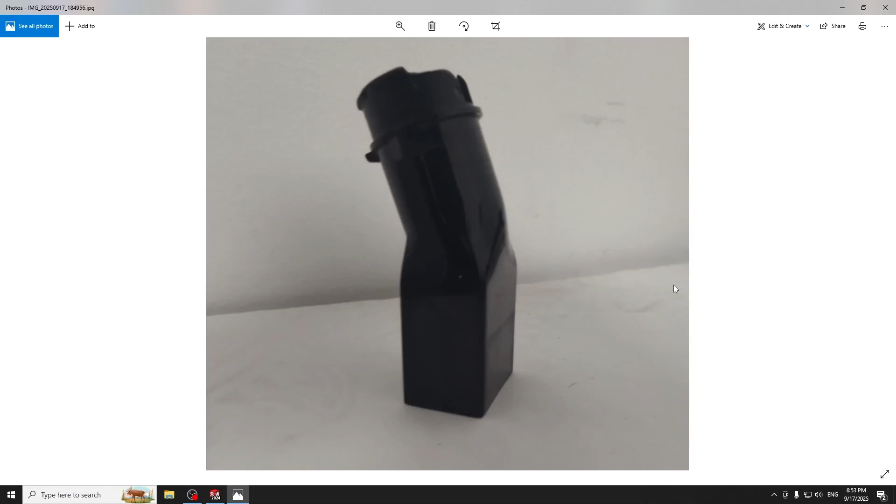Today we have this plastic broken part which belongs to a vacuum cleaner. As you can see, this edge is broken, which locks into another plastic part. Also we have this shape, a tube and a cylinder, with a 15-degree angle.

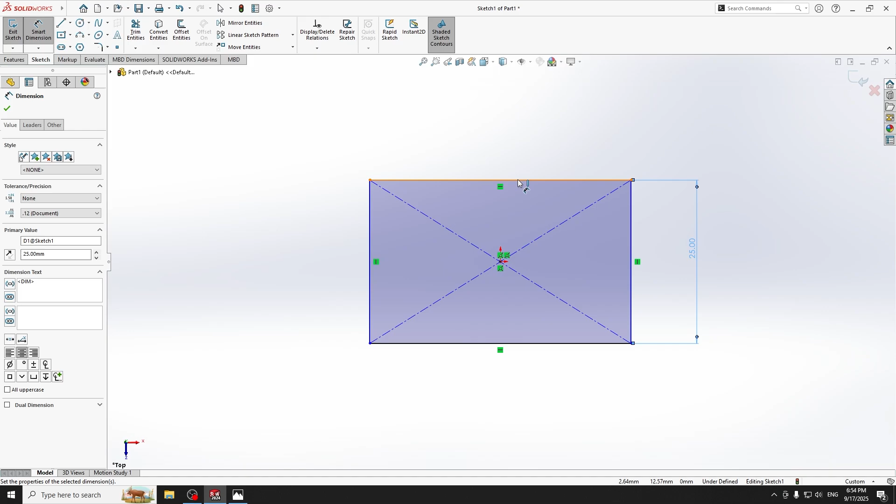So let's go to Solidworks to start the sketch. New part, sketch, top plane. We are going to draw a cube, 25 by 35, and the height is 37 millimeters.

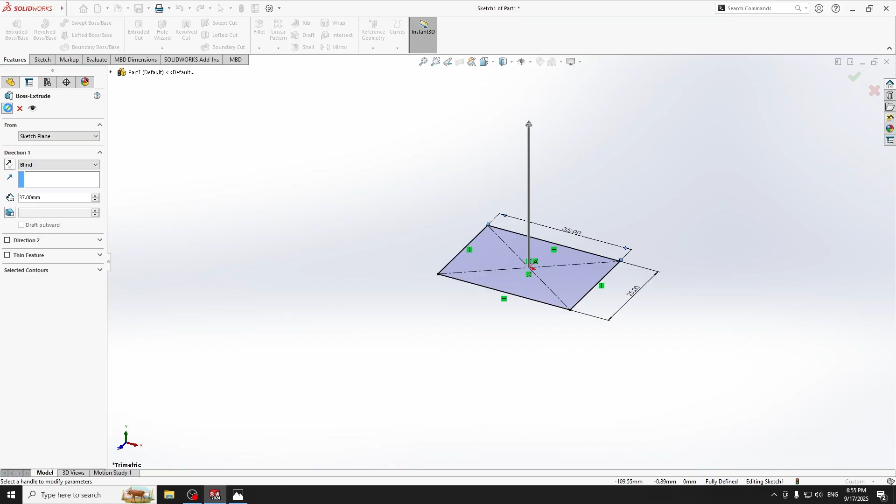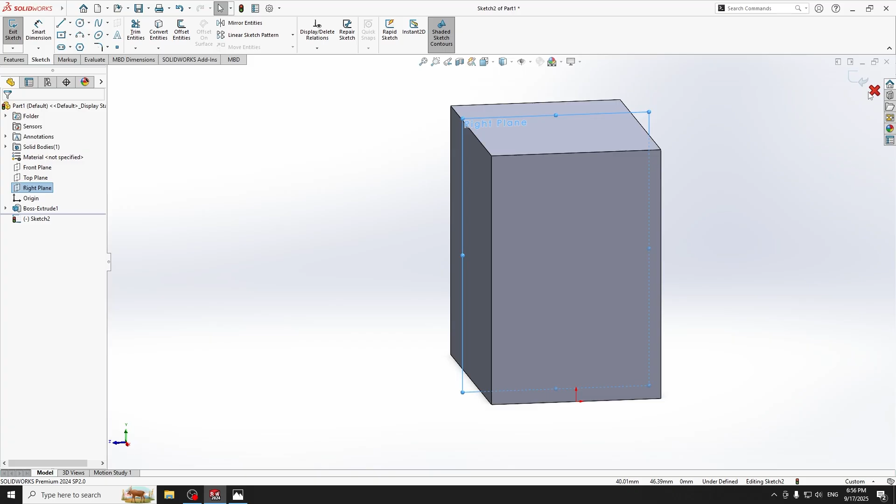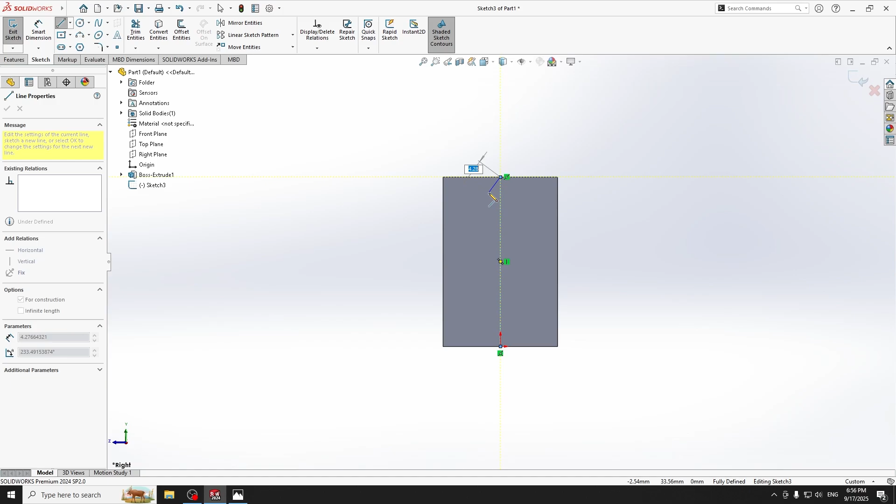It's okay. Bring this face on, go to sketch, and actually we are going to use the right plane this time. Let's remove this sketch. Sketch, choose right plane, and draw a center line right like so, and another center line like this.

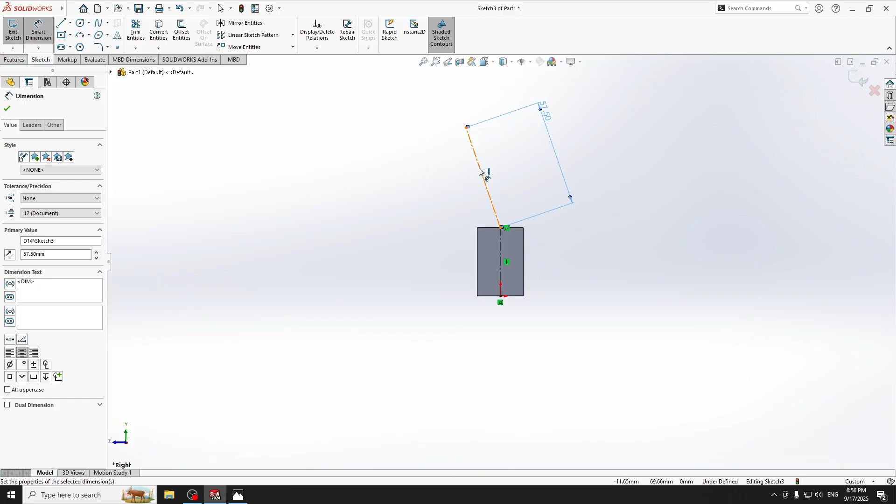This one is 57.5 millimeters, and also the angle between these two lines is 165 degrees. And also we can extend this center line a little bit.

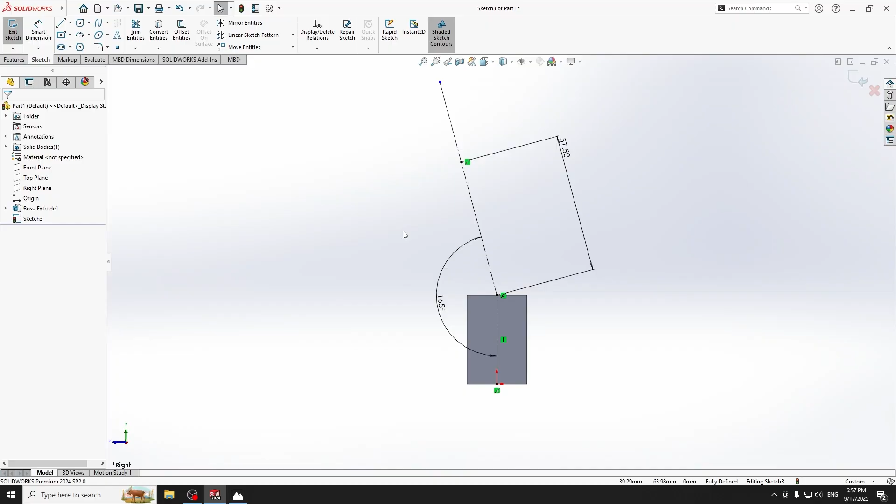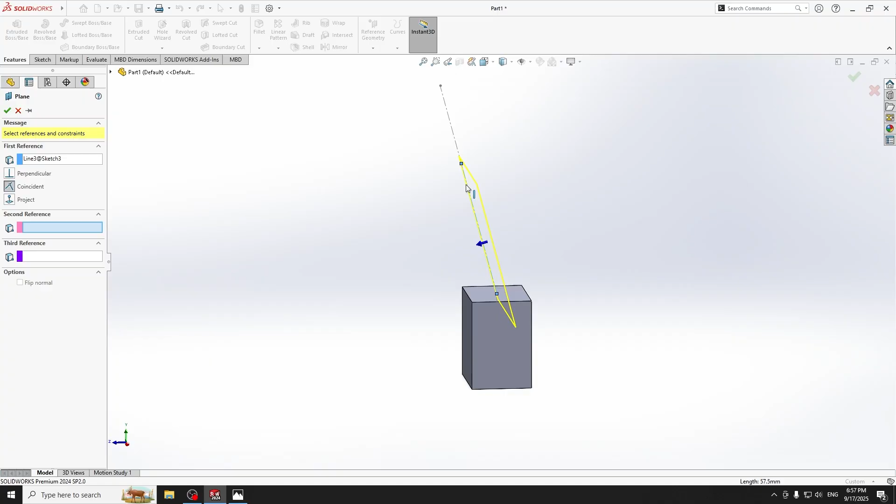Then go to Features, plane, select the center line and select this point. We need a plane like this. Ctrl+8, and let's draw the cylinder.

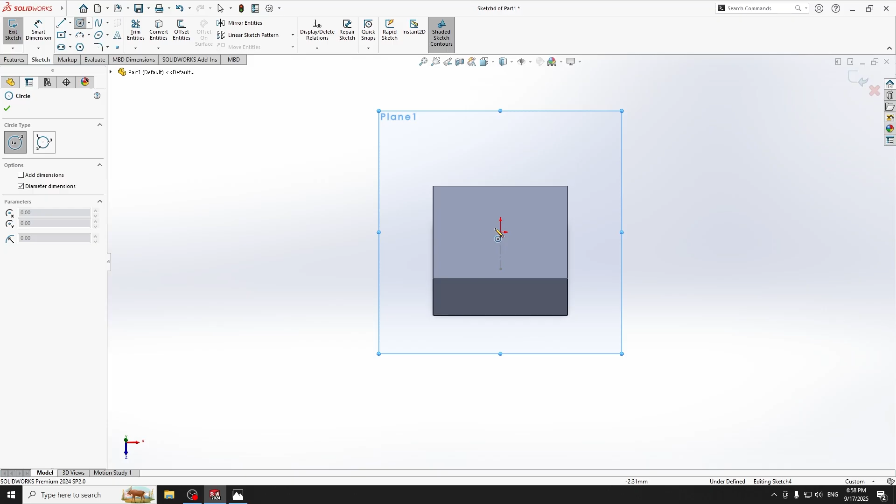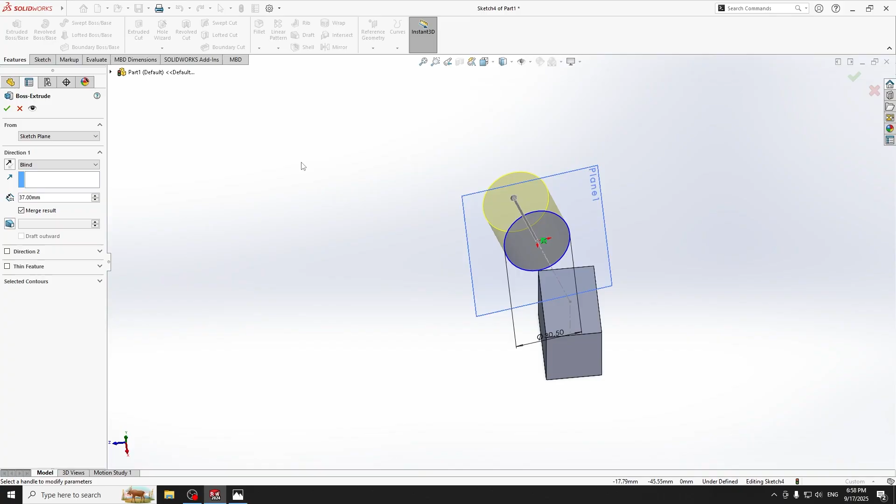The diameter is 30.5, and the height of the cylinder is 37 millimeters. And reverse the direction. It's okay.

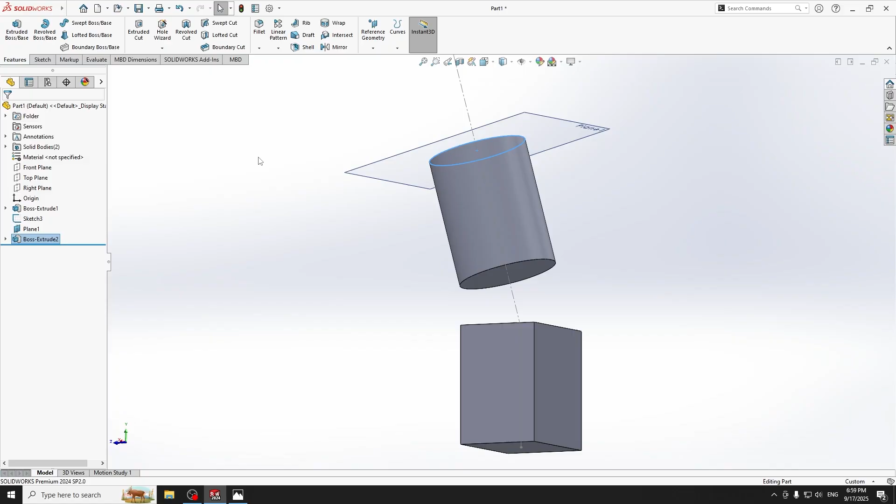Today we are going to use this lofted boss to attach these two objects to each other. So to do that we need to choose these two faces, then go to choose lofted boss, and as you can see this is our preview, and hit OK. That's easy.

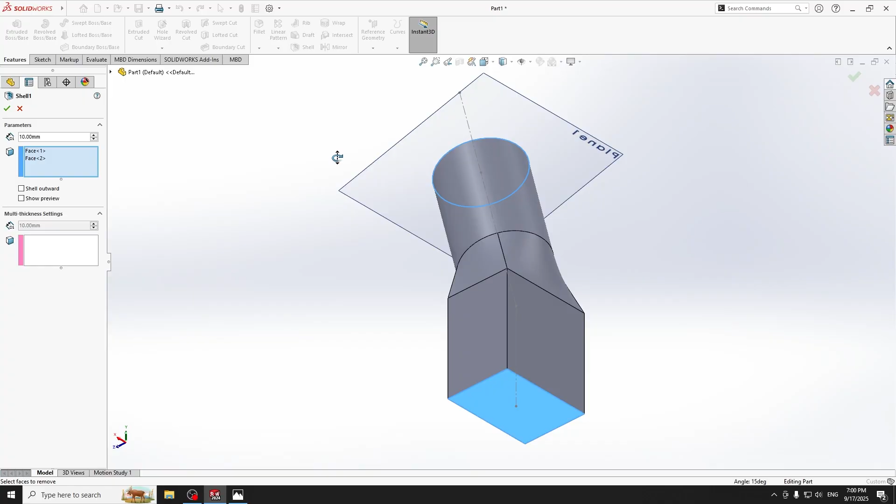Let's continue the sketch. We need to use another tool, this time it's shell. Choose these two faces, go to the shell, and we need about 10 mm. Let's tick show preview and hit OK, and it makes a shell from these two objects.

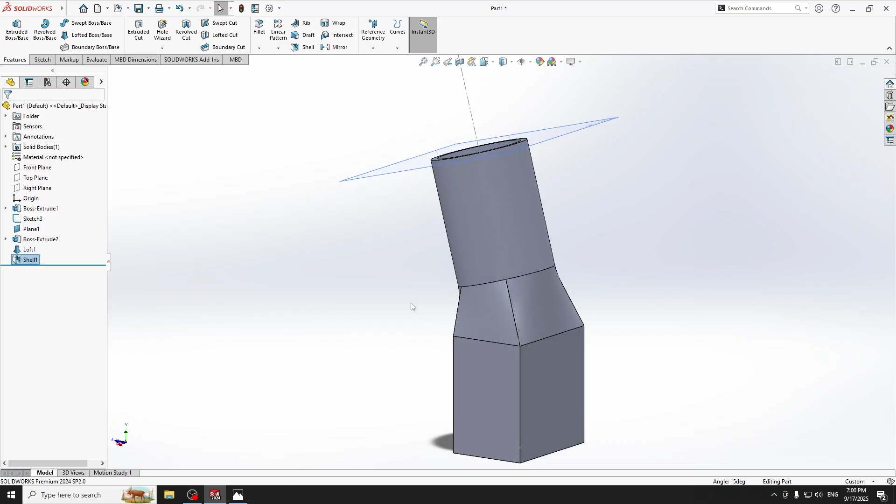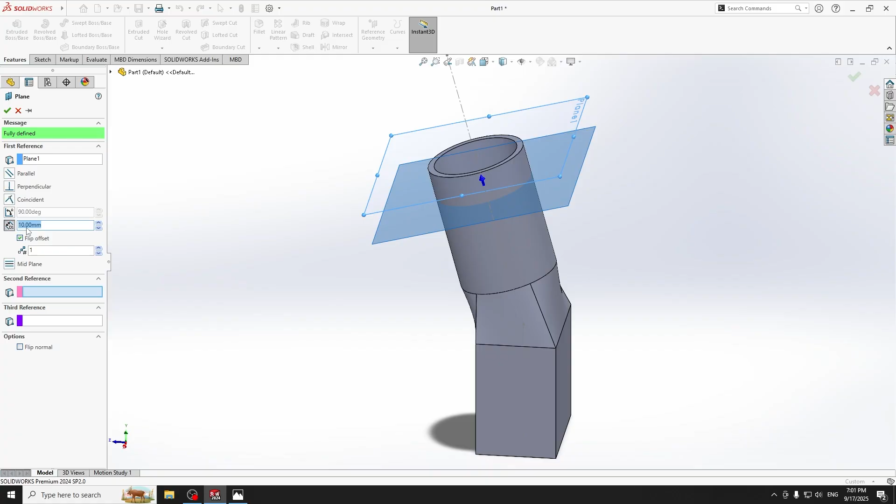Next thing we are going to do is make a plane. Select this plane, go to reference geometry, and make another plane, flipped offset, and enter 10 mm. So we are going to use this plane to continue the sketch. Let's turn off this plane, select this one, Ctrl+8.

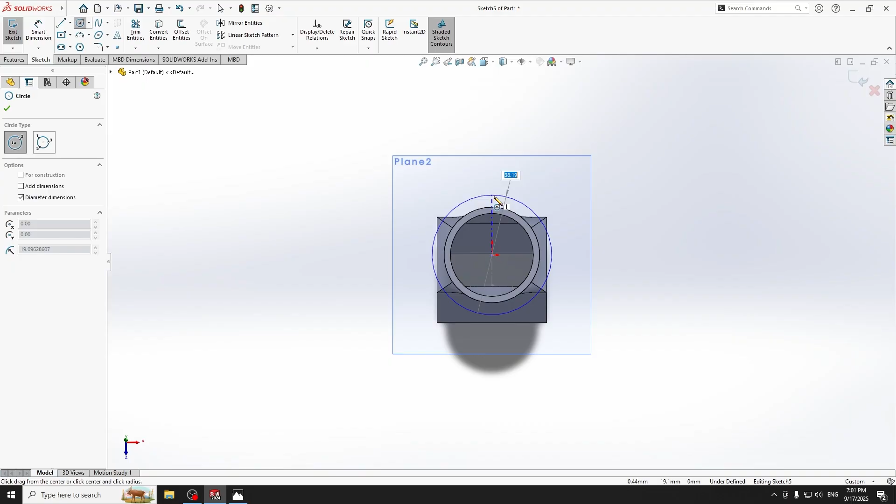We are going to draw some circles. Go to new sketch, draw a circle, and the diameter is 33.7 mm. Then draw another circle, equal to this one.

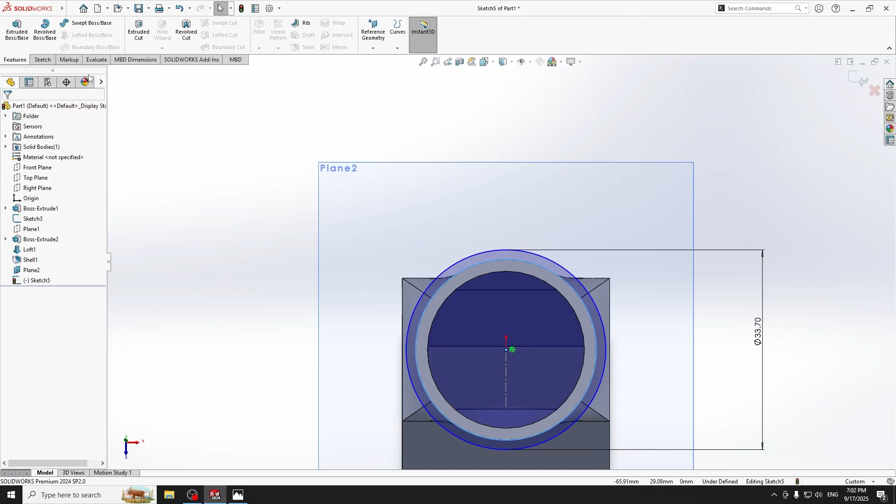Then we are going to extrude this about 1.6 mm. So extrude about 1.6 mm.

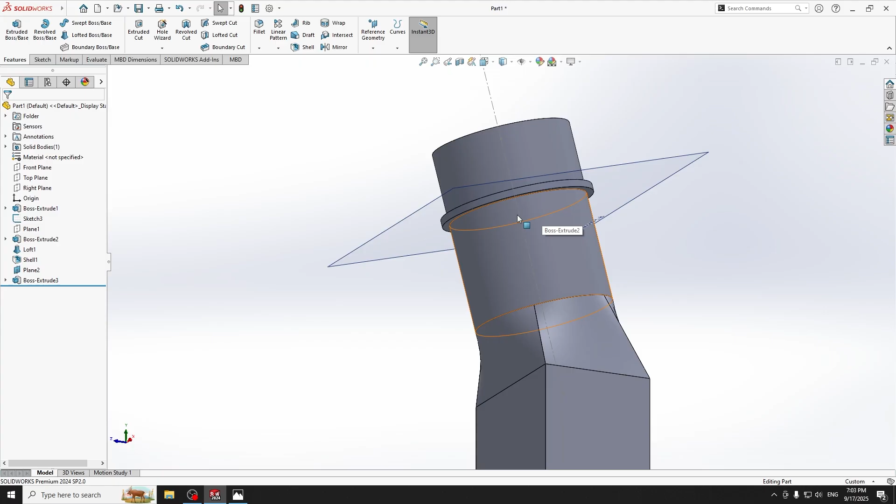Then we need to draw some shape in here, on this face of this cylinder. Select this plane, Ctrl+8, sketch, new sketch, and we need to draw a center line.

And draw an arc like this. This arc size is 7.5 mm.

Next, we are going to mirror it like this. We need to draw another arc in here, and the size of this one is 3.5 mm, and mirror it.

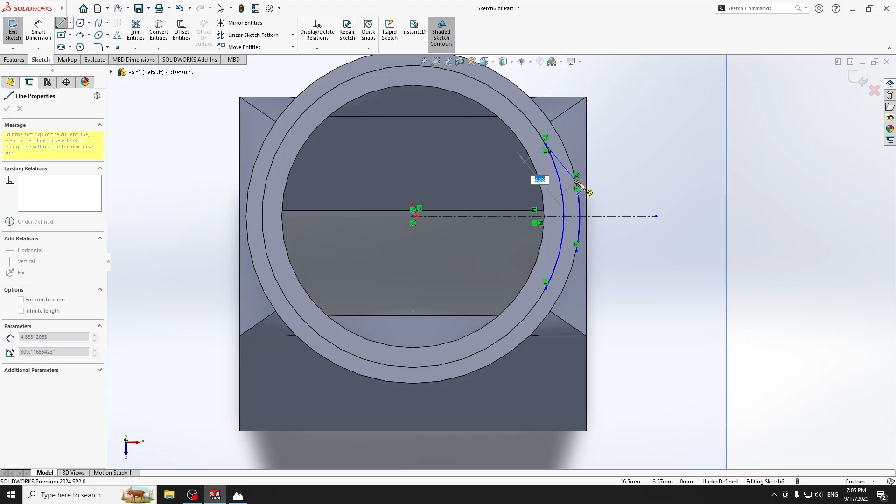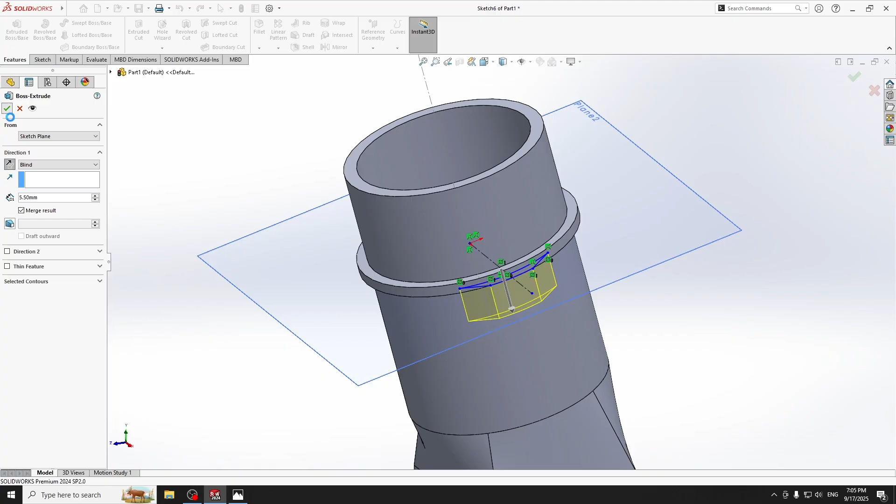Then draw these two lines and extrude it about 5.5 mm. Let me see, no, the opposite direction. Yeah, it's okay. And also we need to mirror this to the other side.

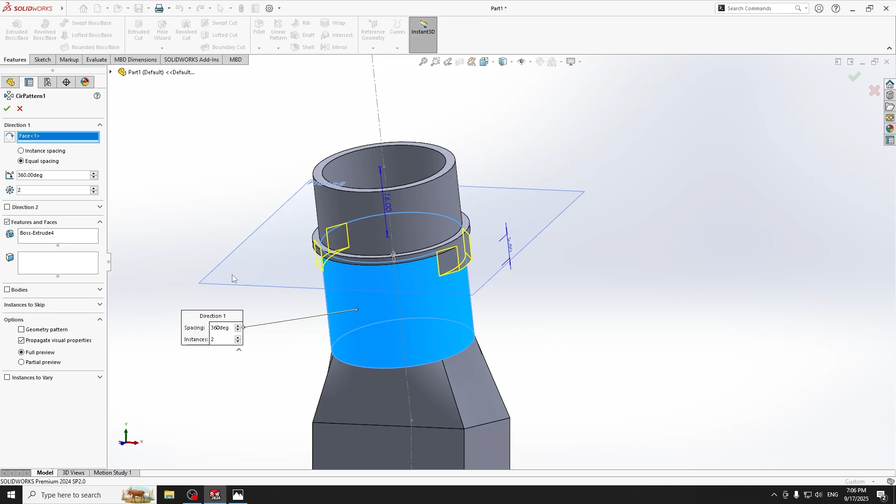To do that, go to circular pattern. We need one, actually we should enter 2. For direction, select this face and hit OK, and it's copied to the other side.

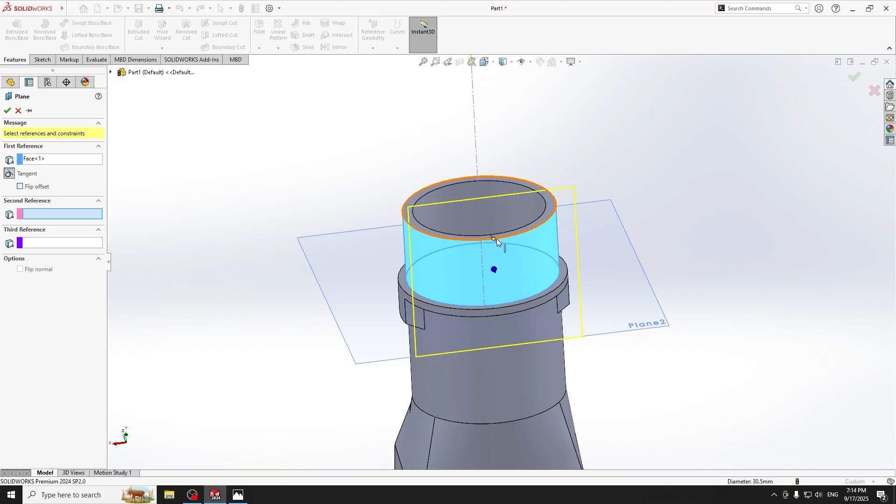Next we need to add another plane. Select a plane, select this face, then for the second reference select this point, this point, and we have a plane.

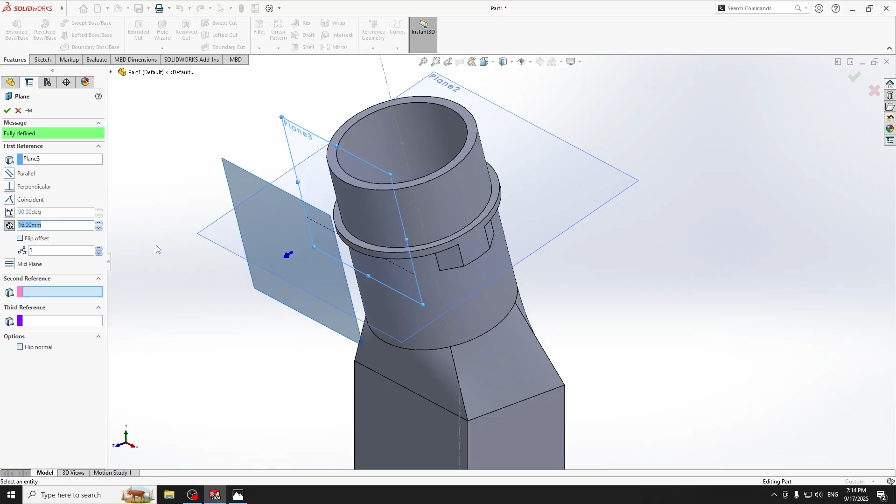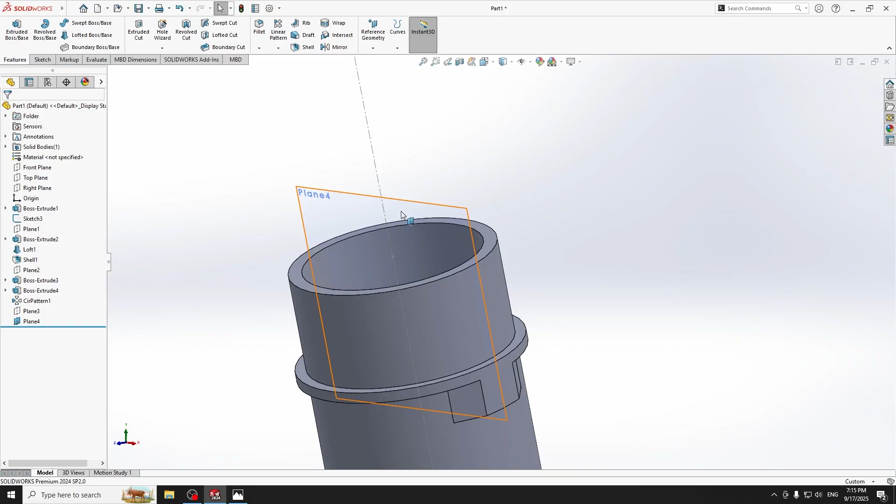Hit OK, and we need another plane parallel to this plane. Flip opposite, and it must be 16 millimeters. Hit OK, and now we can hide these planes, also this one.

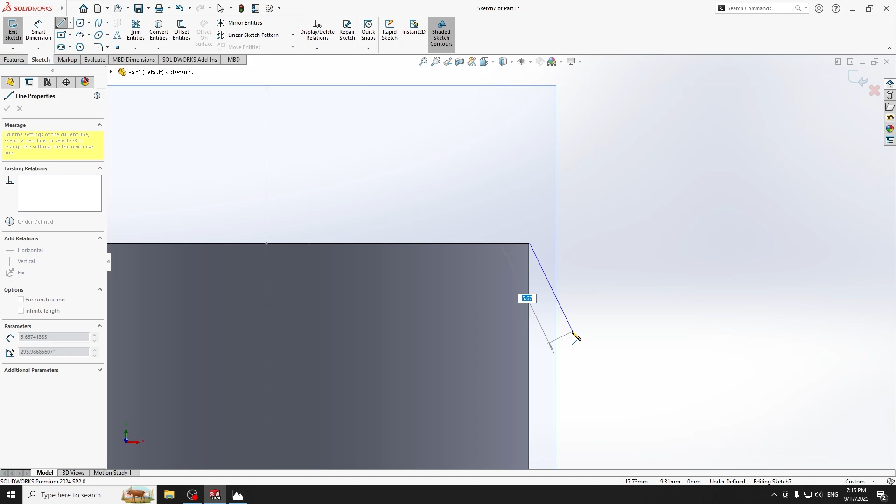Let's create our next sketch. It must look like something like this. Sketch, this point, and the size of this line is 0.5 millimeter.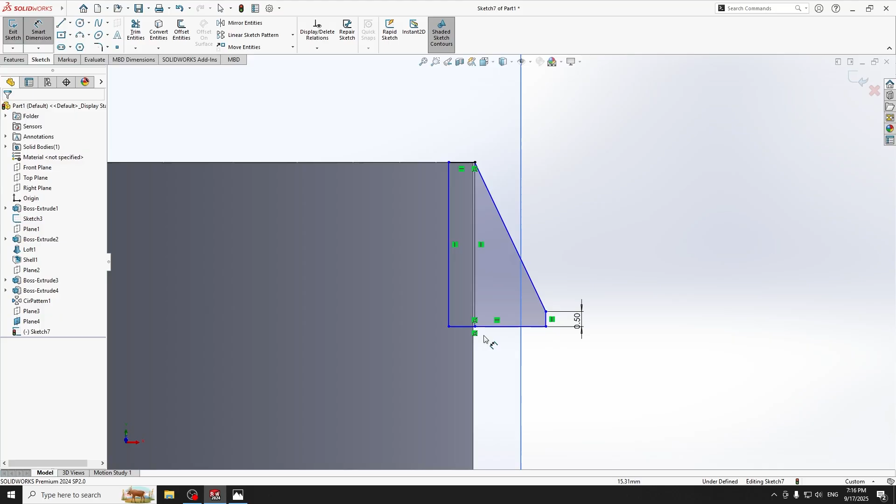The distance, actually let me draw a line like this, and the distance between these two is 1.3 millimeter, and this line is 3.4 millimeter.

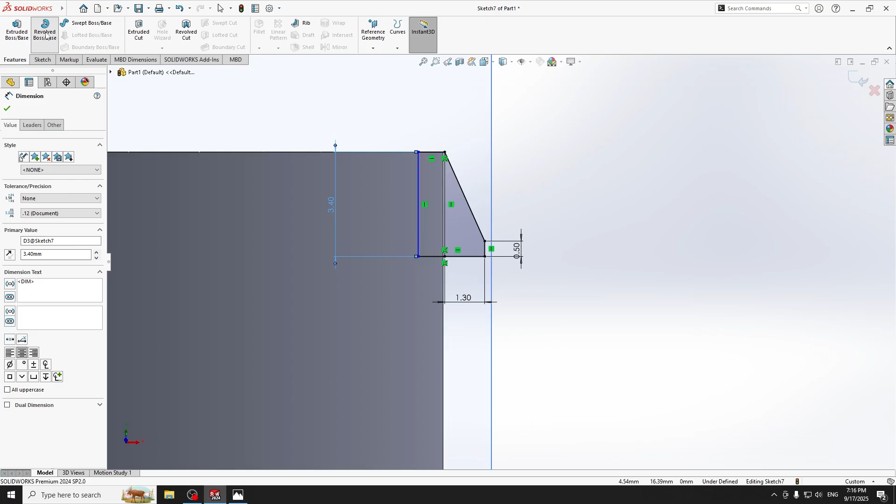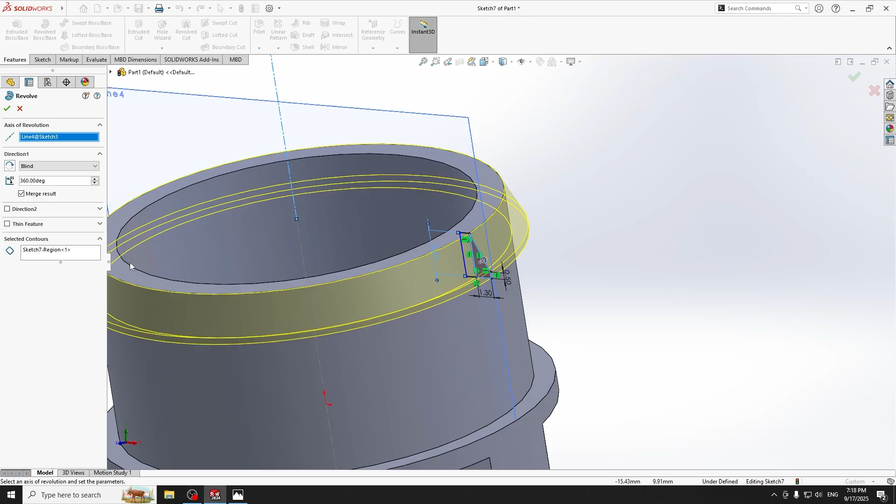So we are going to use revolve boss. Select this line as our axis of revolution, and for contours select this sketch and hit OK.

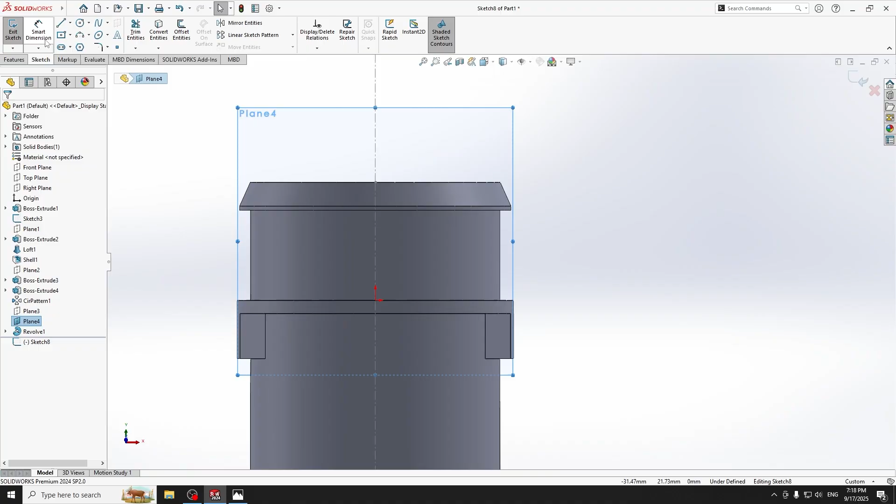Next we need some groove right here. In here we are going to use this plane again. New sketch, draw something like this.

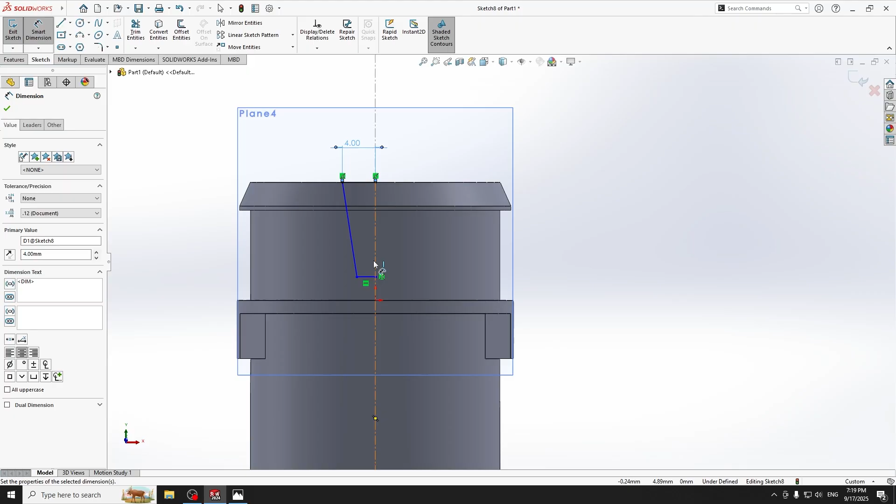This line is 4 millimeter, and the distance between these two lines is 12.5 millimeter, and this line is 3 millimeter.

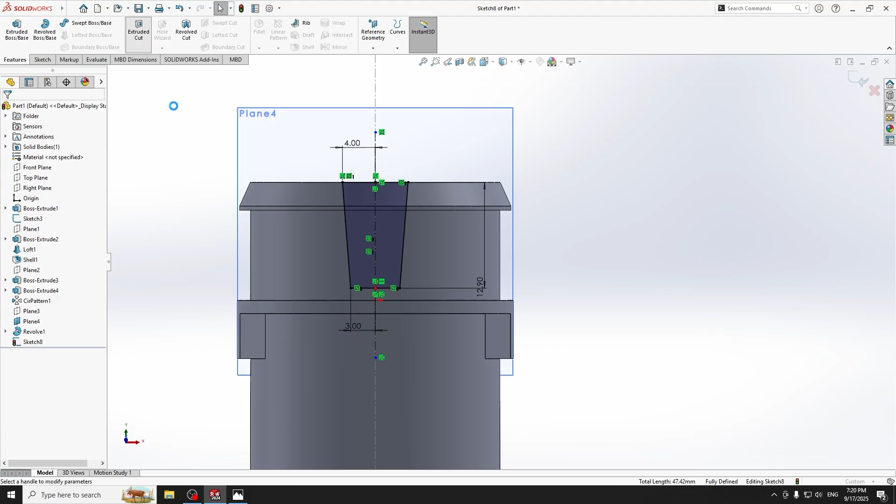Mirror it, select like this, mirror about this center line. Actually we didn't draw the center line. Go to Features, extruded cut, through all, and we need another direction to the opposite side, and hit OK.

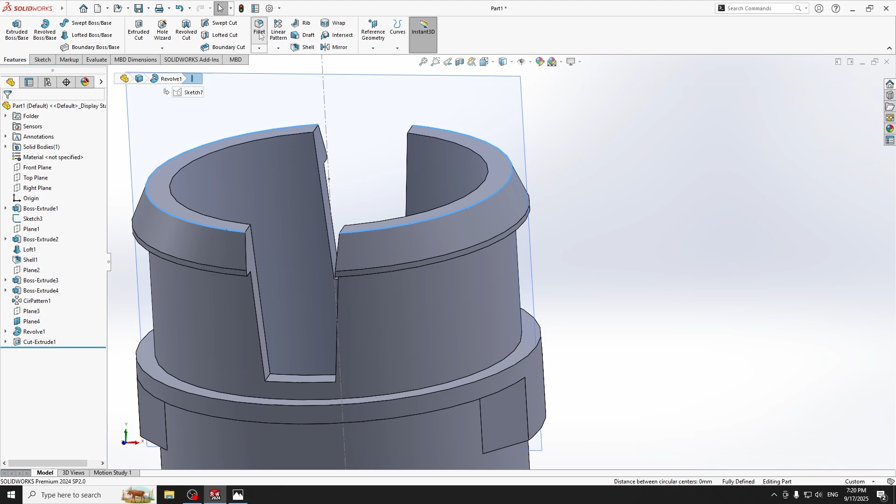Next we need to fillet these edges a little bit. 2 millimeters, fine. And I think we are done.

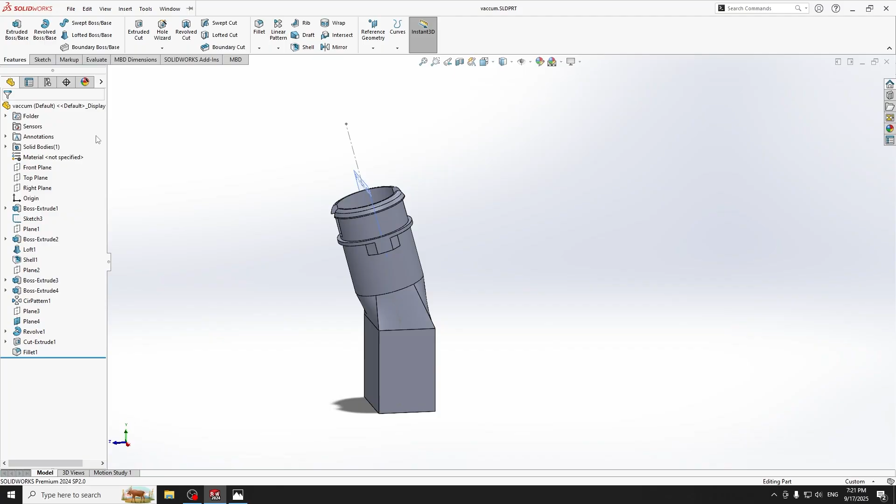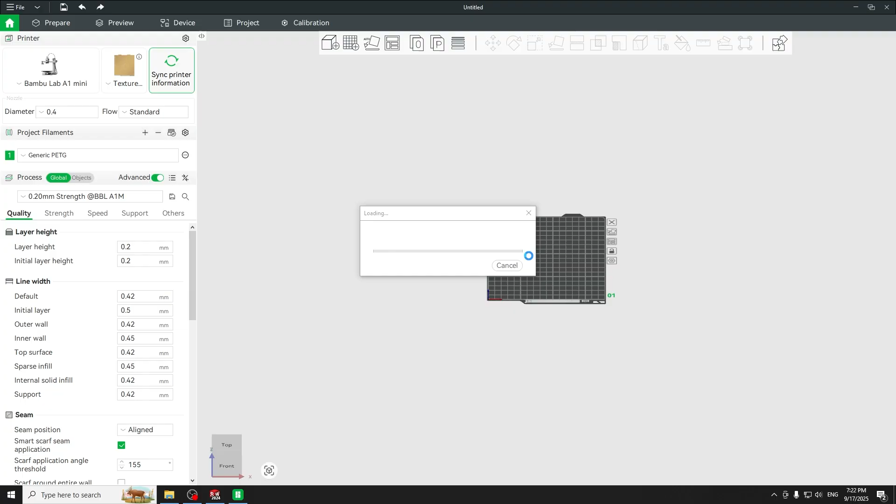Let's bring it to Bambu Studio to make a G-code from this. I'm going to print it this way actually, to have less supports. Enable support, and slice the plate.

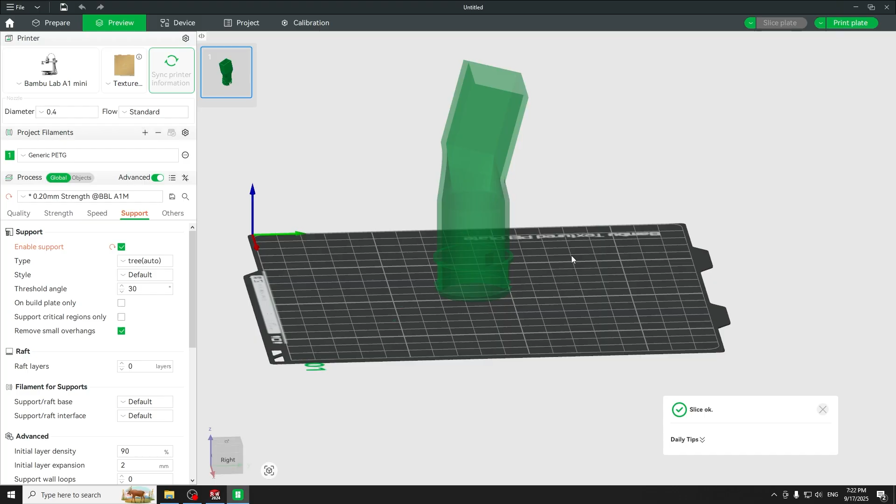Let's send it to the printer, and we are done with sketching and 3D printing this vacuum broken plastic part.